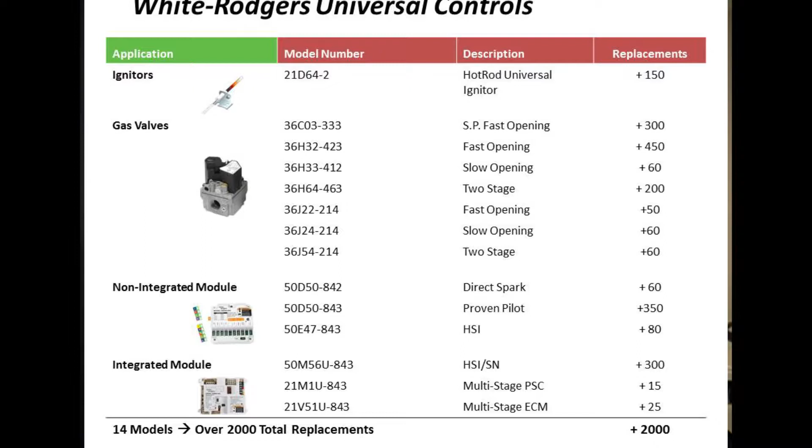All right, so if we looked at some of the universal controls, we'll talk about igniters, gas valves, lots of different gas valves out in the field, some C valves, integrated modules. So you've got 14 models, and I'm going to show you a few more that'll make that number 2,000 even higher. So if you've got 14 items on your truck, or in your van, or at your shop, you can replace 2,000 different parts out in the field. So try to keep it simple by having less but doing more on the truck. And we're going to talk about a lot of those universal controls.

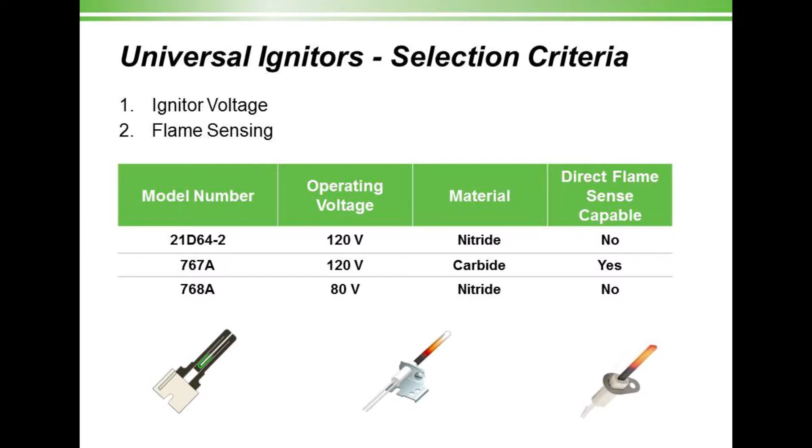Igniter voltage, flame sensing on carbide igniters and nitride igniters. We're going to talk about these later. So if you have a carbide igniter and a nitride igniter, anybody know the difference between the two? Nitride's nice. More so, it's true. What about specifically? They ohm out different. They do ohm out different. One can be ohmed out and one can't. We ohm out both of them.

Okay, so on a carbide igniter, you can ohm out a carbide igniter. The ohm rating, depending on your igniter, is going to vary, and it can be anywhere from 30 ohms to almost 400 ohms. I have a slide somewhere in one of these presentations that talks about all the different ohm ratings on igniters. But you can ohm a carbide igniter by putting your ohm meter on it, and it's going to give you a reading.

And we'll show you a slide later that talks about what to look for on an igniter if it's busted, okay? Versus a nitride igniter, which typically you can't ohm out. Most nitride igniters are non-conductive, so you're not going to get an ohm reading across that igniter; it's either going to work or it's not going to work. And I'll talk about the differences between the two igniters. Yes, sir.

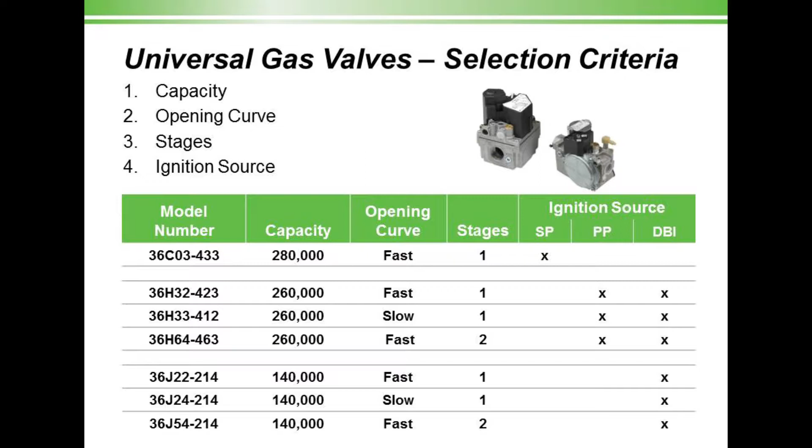The booklet that we're going to cover in a minute is going to show you all those features all in one, so you'll have them in front of you. So when you get out there on a job and you say, hey, I've got either an H or a J valve. I'm not sure which one I have. Let me see if I can figure it out by looking at the booklet. Okay? And what's the difference between the two? Which valve do I need? All right.

All right. Universal furnace controls. We make a board that's very universal. It's called a 50M56U. We're going to cover that in great detail. That board is our most universal board, and it replaces over 90% of the single stage modules out in the field. So one board kind of does it all. That's why we call it a rescue board. Great board to have on the truck.

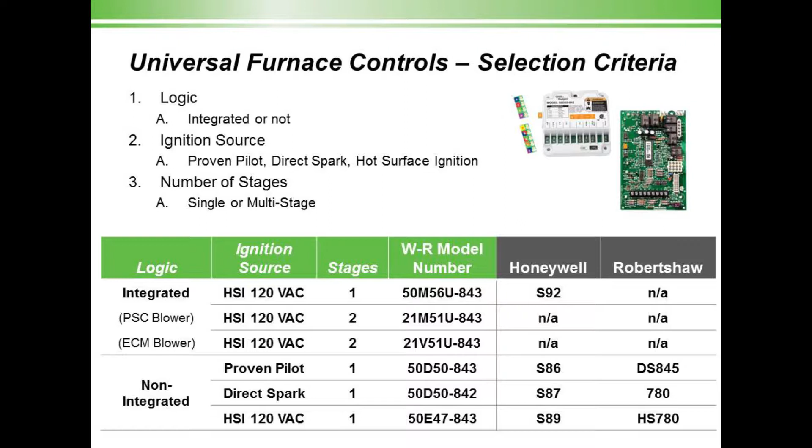All right. So we have those as well, and we have universal controls rescue kits that are single stage. We also have 2-stage kits. We have Proven Pilot, Direct Spark, and once again the 50E47, which has been around for a long time, that non-integrated module. We'll talk about that too. My competition offers a few as well. We like to think that we do a better job of universal controls than they do.

That 50E47, sir, is that a little 6x6 box? Yeah. I didn't bring one with me. One blinking light? Yes, sir. One blinking light. It's got chips that slide in the side, the 50Ds. So if you've ever seen this guy up top, looks like that. Only the Proven Pilot and Direct Spark have chips that slide in the side of the module. Set up the timing for the module. Yes, sir. 50E47 does not, I don't believe. It's just a one shot. I could be wrong. It's been a while since I've had that module in front of me. No, I was right the first time.

So the 50E47, right? We have a Proven Pilot, Direct Spark, and then the HSI, the Hot Surface Ignition module, which would be our 50E47. This is the one you're talking about, right? It has the chips that do set up the module for the different timings. So I think there's 7 different chips. They'll all be color coded. They'll be labeled A, B, C, D, E, F, G. So you look at the module, you reference the installation instructions. It will say, okay, if you've got this S89 Honeywell module, and you need to replace it, use this chip, put it on the side of the module, off you go.

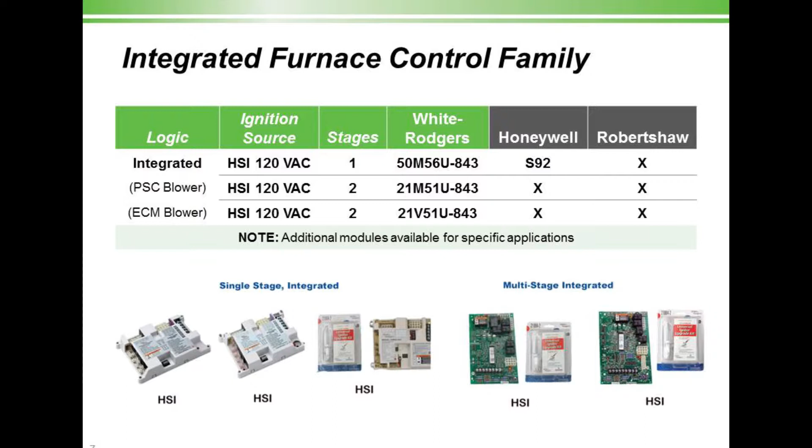If you see the HSI modules on the left, those guys have been around for a long time. We made a slew of 50A50 modules, and then they kind of converted that down into 4 modules, and we called those universal. And now we make just one that replaces all of them. So you don't have to carry 1,400 different modules in your truck, right? Which is nice.

We also make some new modules. They're universal. One's called a 21M and one's called a 21V. They're both 51Us. The 21M stands for 3-speed or multi-tap, so if you have a 3-speed motor. The 21V would be variable speed motors. So they're both 2-stage board replacements. So if you've got a 2-stage furnace out there in the field and you're trying to get a universal replacement, those 2 boards are our universal 2-stage boards.

Yes, sir. And does the 21V... our boards on the Trane product come with dip switch settings. Will that come with the same type? Yeah, it'll look very, very similar. Okay. Check and make sure, it doesn't replace every two-stage furnace out there. But Trane, I believe, is one of them that does. Check and make sure it is the one that you're looking for. On the back of the literature, you'll see it. If you don't see it there, I can show you the app, and the app will cover it. So we can check it today while we're here.

All right, integrated single-stage universal application. So that 50M56U, which is the kit over here, I'm going to break it out and let you guys look at it, is our most universal kit. It's a 120-volt application kit. It has a hot rod igniter inside the kit called a 21D64-2. There is a wiring harness located inside the kit. And most guys start to freak out when I show them all the wiring harnesses, but actually this is probably one of the best features of the kit.

So if you get to a spot where you need an A3 move board, I didn't bring in the kit, but that 21D83M 843, that's our universal Lennox kit, right? And it works on the 83 move furnace. So you can get your Lennox board here, Jackson. It's a little more expensive. What was that kit number again?

21D83M-843. Everybody's like, I gotta focus. Sorry. Perfect. So yeah, so that's once again another universal. And if you're working on that SureLight, I'm sure you've been running to Lennox to get that board. We do make that board. Does it work on the Pulse? No. Do you have a specific OEM model number? Ask him if he has a specific OEM model number.

The Pulse takes a special board, and there is one manufacturer I think that makes it, because that board's been really hard to find out in the street. We do not have a replacement for the Pulse. I know we don't. We have talked about that in the past. Sorry. I know people that have those things. The Pulse module's like a piece of gold, right? If you got that. Because Lennox wants them to go.

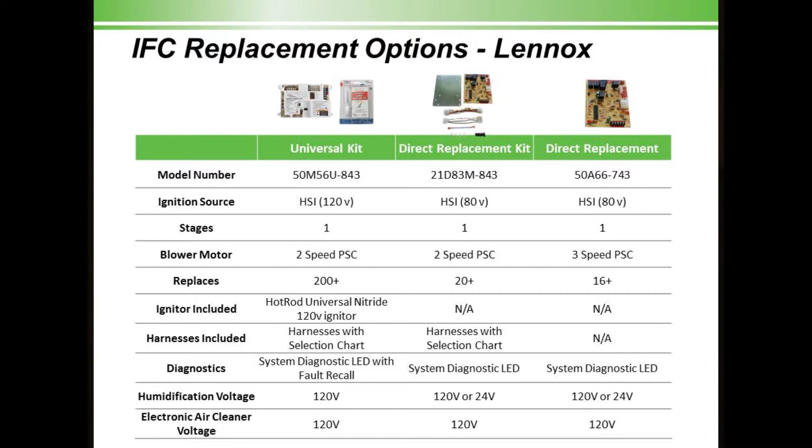All right, so once again, 3 universal replacements, the 50M56U, the 21D83. We also recommend the 50A66. I don't talk about it as much. It's basically a universal replacement board that comes in the Lennox kit. So it would be the actual board instead of buying a kit. I think Lennox sells 3-to-1 the kit rather than just the board, because the kit has the harnesses, the back plate, the fuse. All right, so that's the end of that module.

Before we start talking about the Sure Switch, let's cover the visor card briefly. Usually I start with it first. Today I tried something different. I'm not sure if it's right or wrong. So with White Rodgers, we put out a catalog about every 5 years. And for OEMs, for manufacturers, it gets tough to put out catalogs. But visor cards are handy and easy for us. So we put out one of these guys maybe almost twice a year. We'll come out with a new visor card. So it's nice to have a visor card.

This visor card has thermostats on the front, with the features and options on the thermostat. So if you're ever looking for a thermostat and you say, hey, I need something with lockout, something that does dual fuel, something that has keypad range, I need something with 7 programs or 5 or non-programmable, this is a nice cheat sheet to have. That's what I call it, my cheat sheet. Typically, guys will call me up, and I'm always looking through this thing, right? Nobody knows my secret. I have the visor card.

So on the back of the visor card, we have gas valve information, module information, and igniter information. Okay. So if you're in need of some quick reference, you'll find it here. Now remember that Lennox and Goodman piece I just showed you. It's not on here, so you got to kind of combine these two pieces together until we come out with a new visor card. All right. Or take notes when we do the apps. You got a smartphone, you'll love it. So, like I said, there's 8 different boards up here, and they cross 2,000 boards in the field, which is great to have. Okay? You don't need to stock everything. Okay. That's the visor.

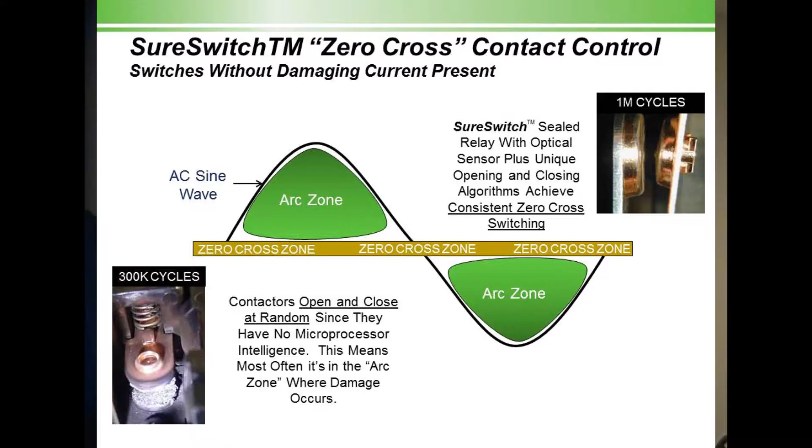So all those things we looked at and said, okay, how can we build a better mousetrap? But not literally getting a mouse in it. A better contact. So here's what we did. We talked about how it leads to arcing, and what we could do so it doesn't arc. The first thing that we did, and you'll see it when I pass this thing around, is we totally encapsulated the points. You can't get any bugs in them. No dust, no moisture. So we got rid of the bug issue. That's probably half the hurdle.

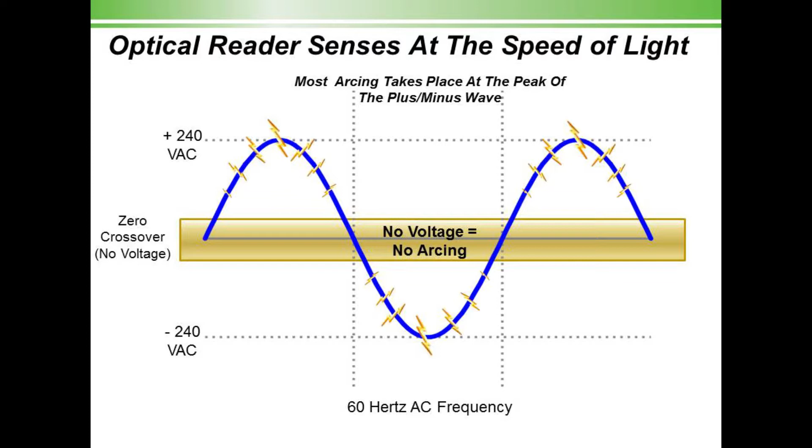The second thing we did to get rid of the arcing, and you see at the bottom here, anybody know how many hertz we have here in the States? 60 hertz. So 60 times a second we go up and down. We're starting at 0. We call it the 0 crossover. No voltage. We go up to 240 volts, down to 0, down to negative 240 volts, back to 0, 60 times a second. Sounds really fast, but microprocessors are pretty quick too.

So what's the microprocessor say? We put a special optical sensor on the board. And that optical sensor says, I can see light as that sine wave goes up and down. We go up to 240 volts and back down to negative 240, I'm going to see light. And then I go across the 0 cross where I don't have any light, down to negative 240, lots of light down there, and back up. So can you guess when I bring on my contacts? At the 0. The 0 cross only. And so what does that do?

If I have zero current and no voltage when I bring my contacts together, no arcing. I got no more arcing. So you think about a better way to build a contactor, that's the way to do it. So we typically, after 1 million cycles, have a set of contacts that look like they're brand new, which is pretty cool. So no debris.

They must have just added that picture too. I like to break it apart. So this one's all torn apart, so you guys can actually see it, feel it, touch it. So I'll pass this bad boy around. You notice it's got heavy-duty lugs, extra terminals for crankcase heaters, hard start kit, capacitors.

Sure. What's the cost on that? Just rough. Wait a second, I got it. I can't see. I love the theory. Yes, it's $49. Okay, so let me talk to you about a few more things.

So first thing we added, we thought was kind of crazy, is you putting your finger, right, on that contactor. 240 volts and you're sticking your finger in there. I mean, probably not a great idea. Maybe use a rubber handled screwdriver. Some guys showed me screwdrivers that got shorter and shorter over the years because they slipped. So I get it.

So we said, you know what, maybe we could come up with a better mousetrap too. So we put a test button at the top. So now you push the test button and you get 5 seconds of runtime on your compressor side and on your motor side. So that's a lot better than putting your finger inside of the contactor, I think.

The other thing we put on the top, you'll see there's 2 dip switches, and you can turn those on and off. The first dip switch is a 3-minute time delay. So if you think about it, here I'm pointing at one of the Jackson Systems thermostats, right? 5-minute time delay probably in that bad boy, right? Correct. Compressor protection, it's great, it's what you need. Most quality thermostats have 5-minute protection, time delay.

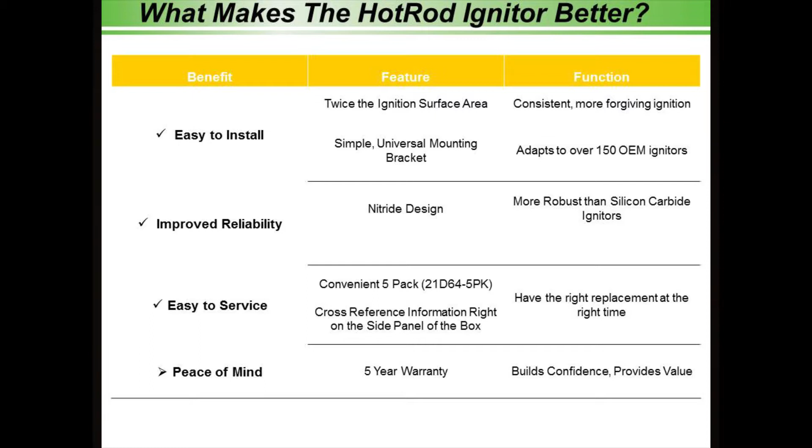So it's simple. It adapts to 150 different OEM igniters. That is over and above what my competition offers for their competitive offering, right? It has nitride design, of course, 120 volts, remember that. Very robust, you can touch this one, you can't hurt it. I hear a lot of contractors saying, hey, don't touch your igniter, right? Don't look at it wrong. Be careful when you open up the box.

And the igniters have gotten better. Norton builds all the carbide igniters. So if you have a carbide igniter, and you look at that carbide igniter, right? Here's mine. It says White Rodgers on one side. What does it say on the other side? Norton. So Norton makes all the carbide igniters, and White Rodgers and Robertshaw sell both those igniters. They have a different partner for those, but those are carbide igniters. So the nitride igniter is a little different.

All right. Easy to service. We make the 5-pack. Jackson stocks that. And then, you try to have the right replacement at the right time. Peace of mind. We put a 5-year warranty on the nitride igniter. That's longer than our competition. I believe theirs is 3 years. We used to have 3 years. We went to 5. So long life igniter. Should make it an easier upsell for Mr. and Mrs. Smith who found they had a bad igniter at their house. Hey, let me give you an igniter that's going to last you a long time.

I replaced a carbide igniter for a gentleman today who had a carbide igniter, came into a wholesale house, right, was looking for the part number. We crossed it over. And they didn't have the right carbide igniter, but they had the 21D64 on their shelf today. He took it just for his own house. He was selling his house. He goes, well, I don't want to spend any more money. And he saw the price. He was like, well, that's not bad. I can live with that. So they're under 20 bucks.

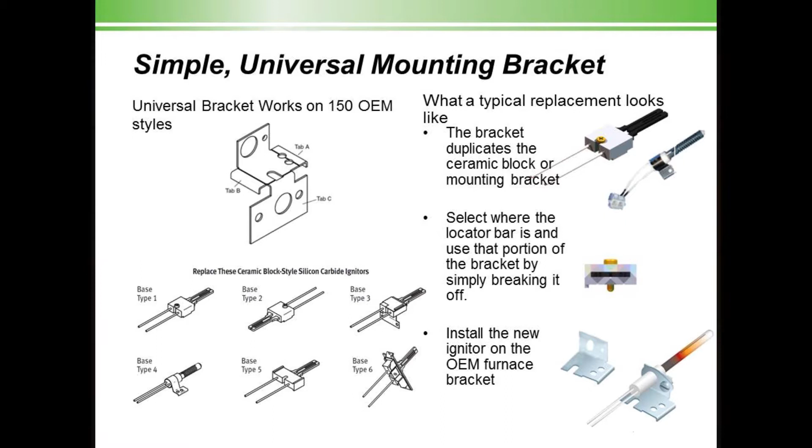Here's a look at the universal igniter and the universal bracket. We've referenced different base types. So if you have a different base type, a 1, 2, 3, 4, 5, if you open up the universal igniter, there's a booklet inside there, and it says if you have this bracket type, take our bracket in here, snap off tab 1, or snap off tab 2, or snap off tab 3, and you're good to go. I don't even think you're going to read the booklet. I think you're going to look at it and say, I need to snap that one off and put it in. So you might look at the booklet the first time.

If you're counting sheep at night, maybe you want to go to sleep at night.

But be aware the booklet's inside there to make it easy. There's basically an A, B, and C tab, and that just basically determines where to break the mounting bracket and use it inside the furnace. Okay. All right. So here's a little ditty. I mean, you guys have all seen that carbide igniter that's busted on the bottom, right?

5-year warranty. Carbides break kind of easily. We talked about ohming out a carbide igniter earlier. I'm not sure if we talked about that online. You can't ohm a carbide igniter. Carbide igniters will work if they're broke. I don't know if you guys have ever seen a carbide igniter. It's got a little crack in it. It'll still glow, right? And it may work for another year. It may work for another week.

Do a spot inspection on an igniter. Okay. So watch it fire. Look inside. See if you can see a crack on it. You ohm it if you have to. It may ohm good, even with a crack in it, depending on how bad that crack is. Okay. But there's usually a 30 to 200 ohm, maybe 40 to 300 ohm rating. So the rating's pretty wide, pretty general.

The whitish gray mark we find a lot on our inspection. Those are cracks or potentials. Potentials. I mean, if you have a 21D, you've got a quick fix. Like I say, you can roll the dice with the homeowner and it may last you another 5 years, but it may not. There's probably no indication that that's going to cause it to break right away, but it's probably not a good sign either.

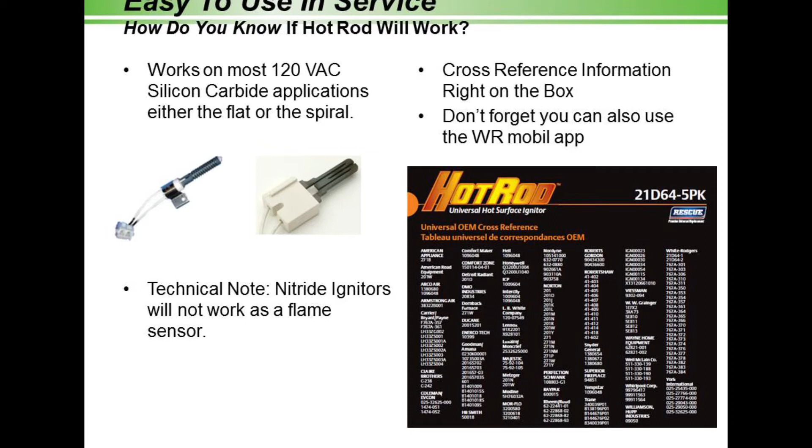So it works on most applications. On the Hot Rod box, we give you those applications. We are upgrading our box. You'll see a new package from us with even more reference and more cross-reference. So, yep, great.

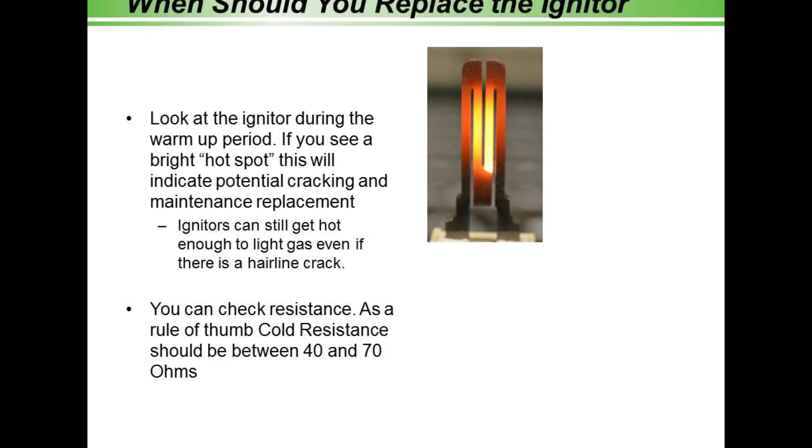So here's an example of that crack I was just showing you. So that igniter is actually working. Did light a furnace, right? But you can see the break in it. It's pretty obvious. So check it. Look for that potential crack. You know, igniters can still get hot. And there's the resistance. Rule of thumb, 40 to 70 ohms, but you can look at them, they're 30 to 300 from what I've seen. 40 to 70 is your good rule. Get outside of that, you might scratch your head.

White-Rodgers has historically had about 65% of the OEM business. So we've got lots and lots of gas valves out in the field. 16, 17, 18 million gas valves out in the field for White-Rodgers. That's lots. So if you see a C valve, you also see an H valve and a J valve. So once again, the C valve was basically a 280,000 BTU valve, pretty high capacity valve. If you flip to page 5, it shows you all 3 valves. I don't know if you'll be able to see that or not. And those valves, we'll talk about the differences in the applications.

So you'll see the C valve does direct spark, hot surface ignition, proven pilot, and standing pilot. There's all 4 different applications. You'll see the H valve doesn't do standing pilot work. Okay, so the C valve's been around since 1974, right? A long time. Dinosaurs roamed the earth. The H valve came after the C valve, and they weren't making standing pilot furnaces anymore for the H valve. So they went to a different valve, had a little more capacity, about 320,000 BTUs, but didn't handle standing pilot. But you'll notice at the bottom, the characteristics, it does 2-stage work, where the C valve did not.

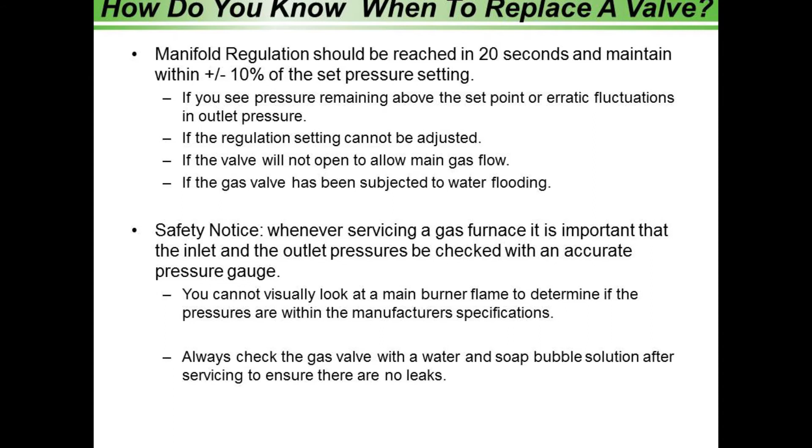If the regulation cannot be adjusted, replace the valve; if the valve does not open, or if the gas valve is subject to water flooding. Water and gas valves do not mix. We don't sell replacement parts for gas valves for a reason. We just don't want the headaches and the insurance battles and everything else. Too many pieces and parts inside that valve, so we'd rather not take that risk.

So we talked about the ignition sources in the book: standing pilot, proven pilot, direct burner ignition, direct spark, or hot surface ignition. I don't think there'll be any questions with you guys. If we do this again, I'll go into more depth on all those applications. Okay.

Once again, what's the furnace input? Look at the rating. There's fast, there's slow, there's two-stage, fast and slow opening valves, and I'll show you those as well. White-Rodgers gas valves come with reducing bushings. So if you open up a gas valve box, I didn't bring the right box, you'll find a reducing bushing from 3/4 to half. And there's usually a spring, natural to LP, inside, but they'll get lost, always. Maybe you'll have one in your truck, I don't know, some guys do.

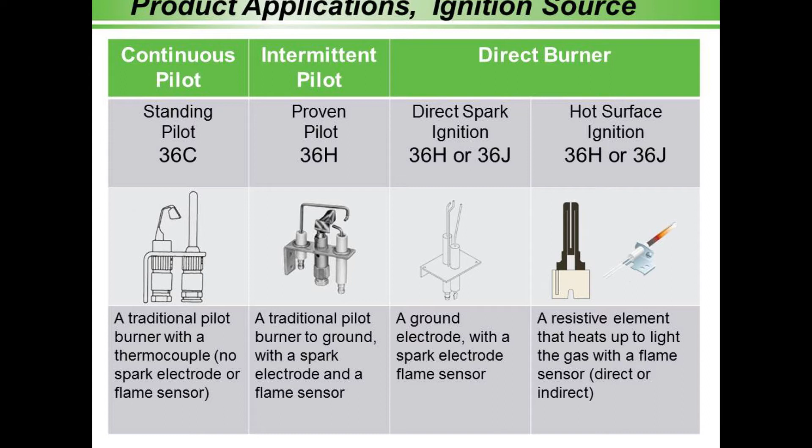There's the 4 different types of applications we were talking about earlier. I've got a gas valve tray. You can check combustion. It's really hands-on. Most guys are looking at hot surface now. And I don't know how many applications you get for standing pilot anymore, but I typically see 5 to 10%, maybe a little less, and that should be going on like that. Unless you go to my mom and dad's house and you'll find one.

Proven pilots, there might be a few of those out there with spark, electrode, and a flame sensor, and of course direct spark. And you'll notice standing pilot's got to be a C valve, proven pilot's going to be an H valve, direct spark's going to be an H or a J valve, and hot surface ignition will be H or J valve. Could be a G valve as well. It could be that G valve too. Okay.

There's 2 different definitions of pressure drop on the H valve and the J valve. Once again, whether you're doing natural gas or LP, the different pipe size. If you're doing 3/4 by 3/4, that 36H will go up to 300,000 BTUs. If you're doing half by half, you're only 170 on the natural gas side, 140 on the 36J.

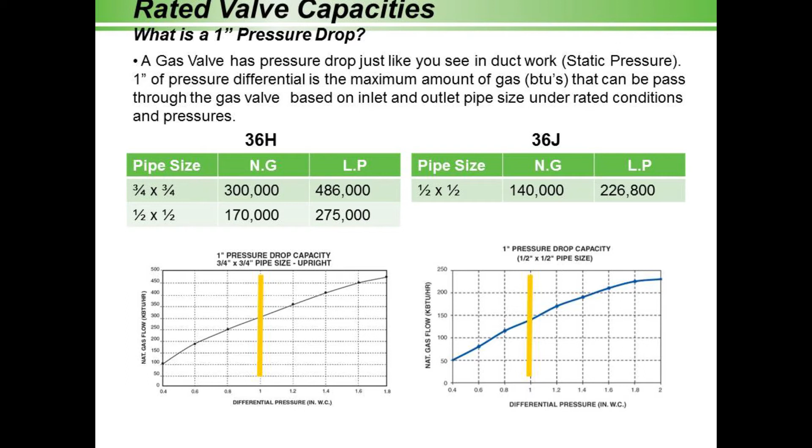Once again, what is a 1-inch pressure drop? Gas valve has a pressure drop just like you'd see in ductwork, static pressure. 1-inch pressure differential is the maximum amount of gas BTUs that can pass through the gas valve inlet to outlet under certain conditions and pressures. So just remember, if you've got a 3/4 by 3/4 valve, it's a higher capacity valve. We make fast, slow, 2-stage, and you'll see the step openings on the 2-stage as well, from first to second.

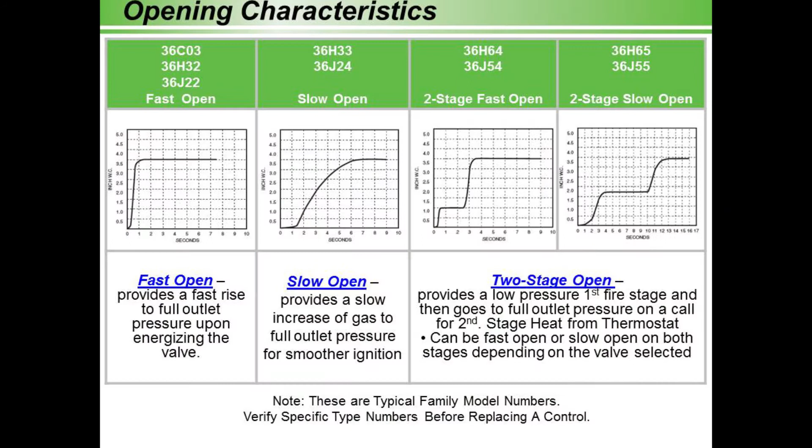Anybody working on variable speed yet? Modulating. Yeah, I don't have any modulating stuff yet, but maybe I need to. What percentage of the business is that for you guys? It's 10, 20%, somewhere in that range. The York fully modulating furnace. You talking about modulated gas valves?

Yeah. Well, maybe we'll talk to the guys at Corp and have them add some modulating stuff in the future. If you guys are starting to do some of that work, it'd be good to have it in here just as reference. We don't talk about it much, but we should. Typically, OEM stuff comes out and 5 years down the line the aftermarket guy like me is talking about it, right? It's getting to that point. We're almost into it, probably 5 years or so. Maybe not quite, but close. That's a good thought. I gotta remember that.

Ignition source. We've talked about most of this stuff already, as well as stages. 98% of the furnaces manufactured the last 10 years can be repaired using a J valve. 98%. That's pretty good. We do not replace smart valves. I don't have replacement for those, 1, 2, 3, or 4, whatever smart valve version they're on. So you have to go back to the competition for that. There's nothing smart about those valves.

How many guys have a smartphone? Got one? Smartphone back there? He's got a smartphone. He's on it right now. Nate's got 3 smartphones back there. I'm not kidding you. He's got 3 iPhones. He's running them all at the same time. I think he's got stocks, girlfriend, boyfriend. Maybe he's married. I don't know. So he's got lots of stuff going on.

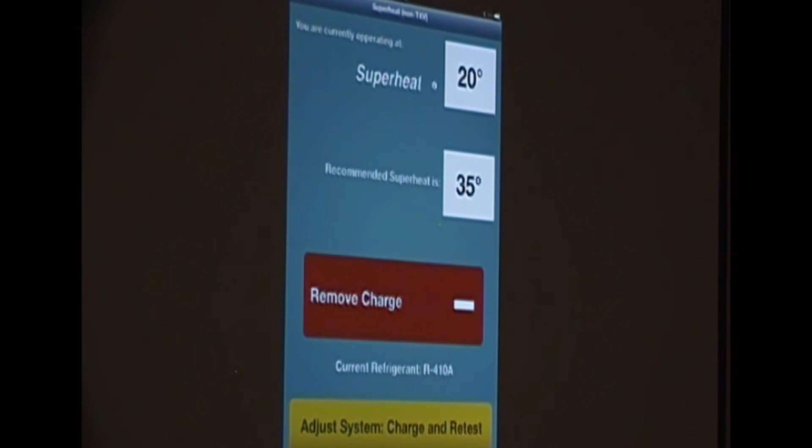Recommended superheat on that job was 35. I need to remove some charge. That was pretty quick for doing a superheat, huh? Pretty cool. So those are great apps that are free. You can check yourself, make sure you got the right superheat going on. So adjust it and recalculate.

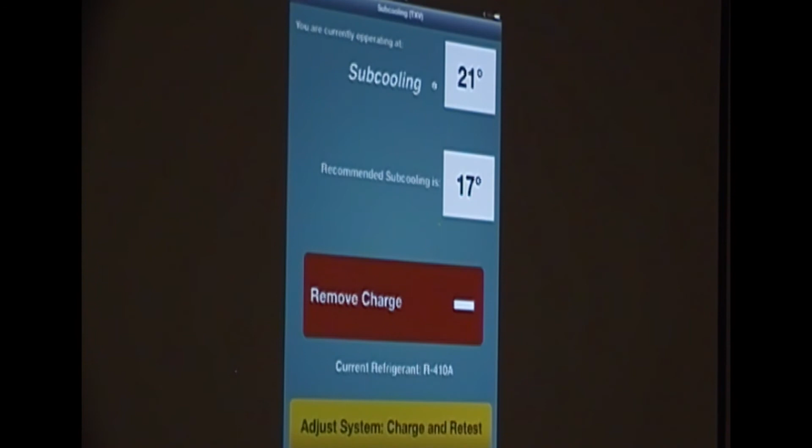So how about a subcool? Do the same thing with subcooling. Pick my required liquid. Pick my liquid line temperature. Calculate. Oh, it's close. Subcooling 21. I'm recommended 17, so I need to try that one too. So great tools to make your life easy in the apps. So that's HVAC Check and Charge. There is on the HVAC Check and Charge proper airflow as well, so you can do airflow work if you want to.

I don't know. Do you guys do superheat subcool every job? Oh, all right. Yes, it's a good answer. Have you used it, even if you don't? Yeah. Good answer. All right.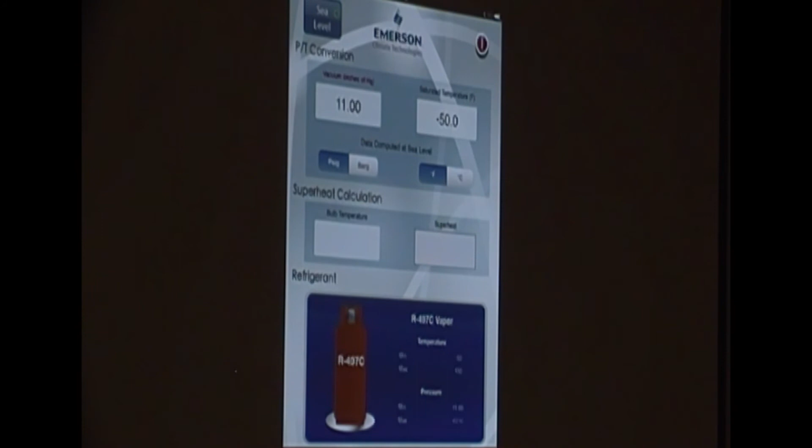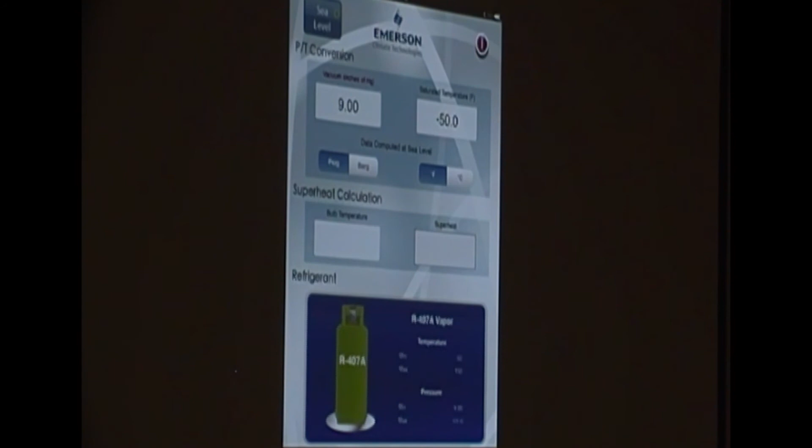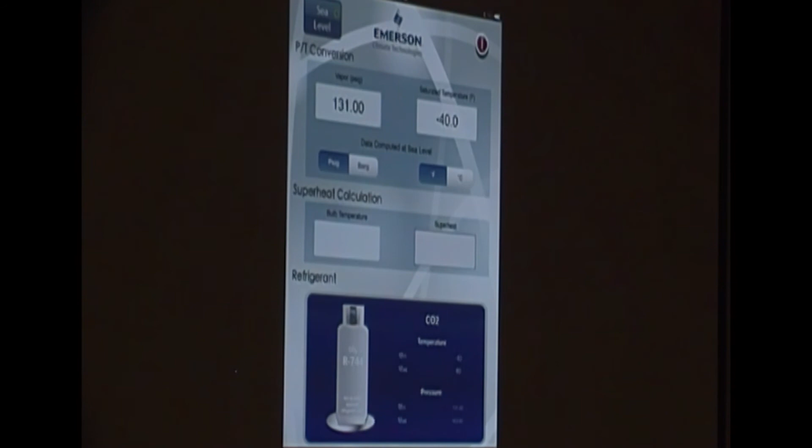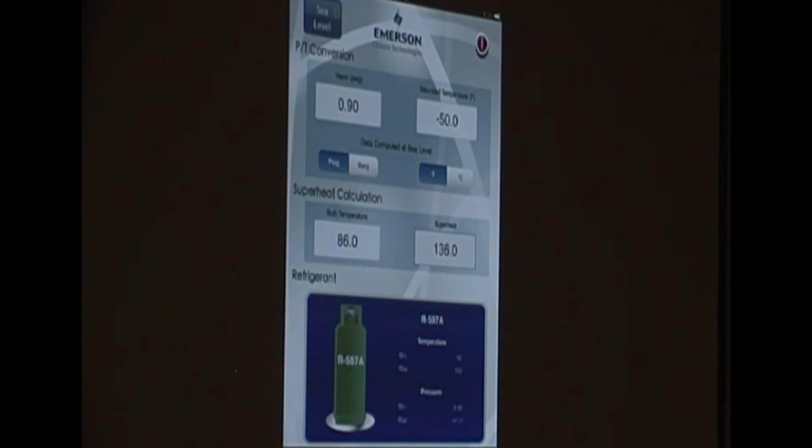So just do your superheat subcool this way too. So type in the numbers, right? And as you slide it, notice it changes by vapor or vacuum. So pretty slick. I like it. And like I said, there's probably a couple others that you like better. Maybe you're used to using it.

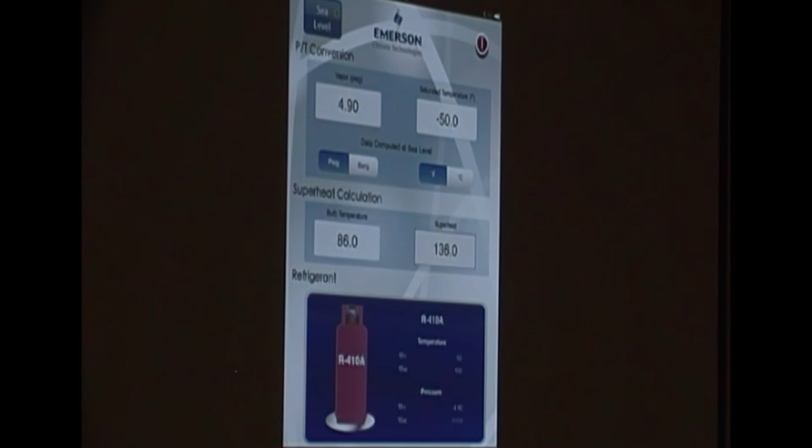All right, so we'll go into Copeland before I hit my favorite. So Copeland's app has been redone. If you don't have the XREF, I recommend it. I like it. It's got a scan feature, so if you hit the scan button, it'll scan a barcode, and then that barcode will give you the information about the compressor. If you don't have the barcode or don't have the ability to scan it, just type in your part number.

ZR4. Anybody ever worked on a ZR4 compressor before? Copeland makes a few of them. There they are. I'm working on that guy, right? So my mechanical work is up top. I got the height, the shipping weight, the mounting, the suction size, discharge size, oil type. If I want the electrical information, even got my run capacitor on there too. How many times you want run capacitor information on your compressor? Pretty cool.

So this stuff is designed to save you money so you can get to the next job and make somebody else more money. It's nice to call Jackson every now and then, Jackson loves it when you call him. But if you have the information in front of you, you can save your calls to these guys for the important calls. Like I need to buy 200 White-Rodgers thermostats. That's more important. That's a good call. We take those calls too.